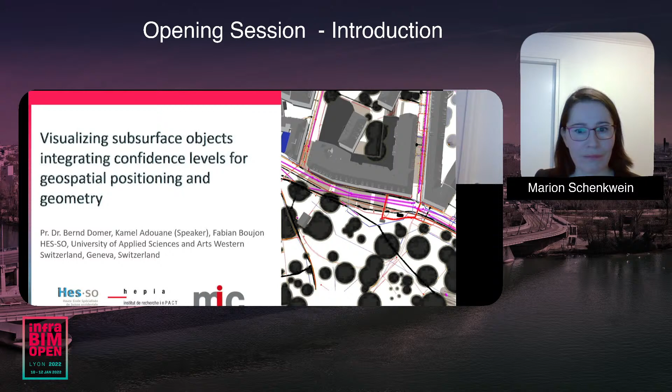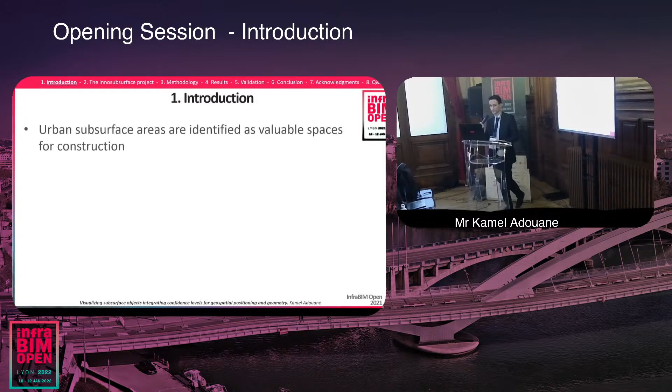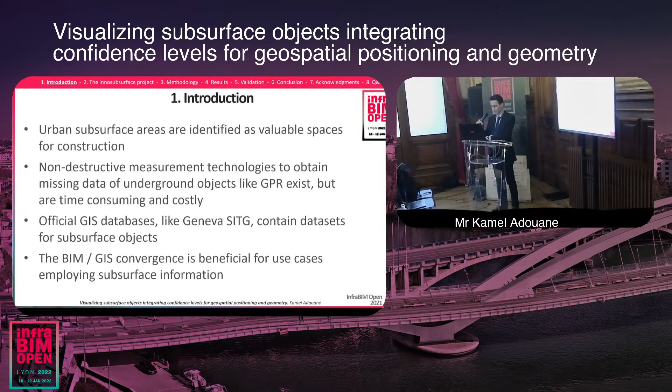The overall objective of the project is to obtain a complete description of subsurface objects, including placement and geometry for the management of underground volumes. In order to fully place an object in 3 dimensions, we need both a placement plus a geometry. To control our data flow, we went through, first of all, the development of a data structure for subsurface objects, which is called the minimal data model, that specifies all our geometric primitive requirements.

We then went through the integration of the information present in the SITG Geneva database to fit our minimal model requirement for the data we already have. If some of the data we're looking for is not available, to identify it first and then additive hypothesis. Also, we had to determine the confidence level for the represented data, since uncertainty gathers in our data flow. And finally, we went through a qualification of spatial information for underground volumes.

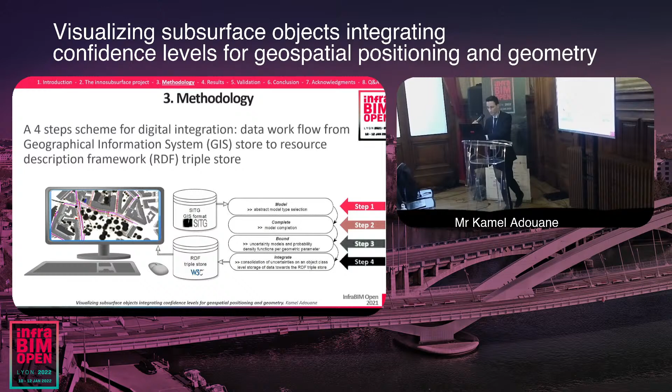A set of simplifications of geometry is involved in the models to represent, for instance, buildings modeled by extruded polylines. To model foundations, we used cross sections of rectangles along a line. Cylinders are also used in our model, or tubes and pipelines as geometric primitives.

Let's have a look at other sets of simplification of geometries. Pipelines with trapezium cross sections again. And there is an uncertainty along the depth which is characterized by the alpha angle. Cubes to characterize truncated cones, again with this alpha angle for the uncertainty along the depth, and a set of 2 cylinders again.

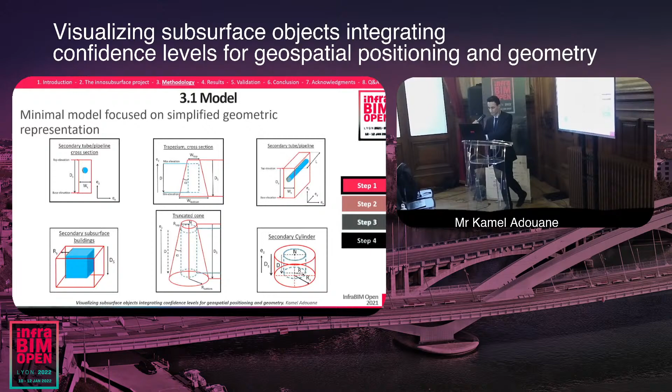The SITG database we used had first to be completed before our geometric parameters could be fully used. However, we had to face 2 issues to cure before seeing our objects in 3 dimensions. We will see examples on the 2 next slides.

The first aspect we had to correct is quite rare and concerns the dimension of some utility lines. The second one more often concerns the depth of the subsurface elements, which is, for instance, the Z coordinate; a confidence level associated to the precision forecast, according to Geneva expert interviews, is developed.

Let's have a look at our first example. To place an object underground, we need both a placement plus a geometry. In that case, we want to place a pipeline underground. The placement is complete. The geometric primitive is incomplete since the diameter was originally missing. We had to complete it by adding a hypothesis about the diameter, which is characterized by this green arrow, so that now our object is conceptually complete and we can project it in 3D.

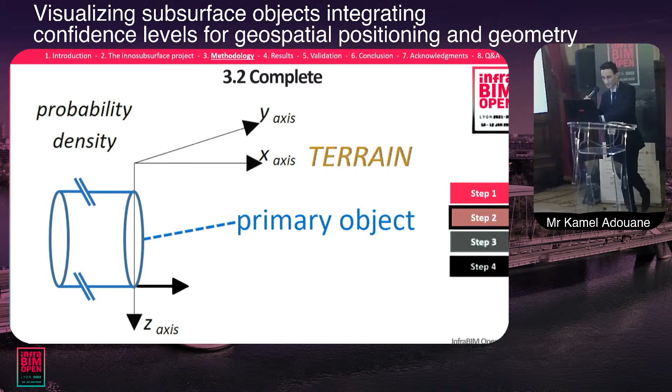Second example, we have a geometric primitive which is a pipeline which is complete, but the placement is not. The Z is missing, so we had to use a statistical law called the PERT law, which is a beta law characterized by a set of 3 coefficients, A, B, and C, in centimeters. This law is calibrated with empirical data from a different location with similar data sets, where the depth is not missing.

In the SITG database, the positioning and the depth are subject to uncertainties. This uncertainty is captured in a dual form called the secondary geometry objects. In the case of a natural tree root, we have a cylinder for both the primary object and the secondary object. In the case of a pipeline, for the primary object, we have a tube. For the secondary object, a rectangle.

Confidence size: with a higher degree of confidence, the bounding volume increases. However, this representation is purely conceptual. So now we'll have a look at how it can be implemented.

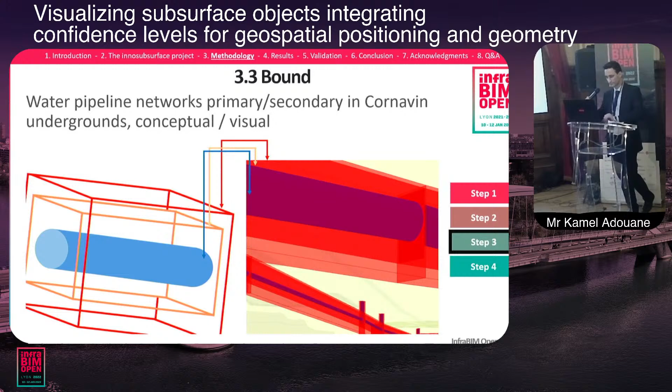The strategy of our subsurface global workflow for our data is to converge all the information towards an RDF triple store, which includes, first of all, the development of an ontology expressed in OWL. This gathers information about the minimal model. We then need to get all our information from the database with a set of additions. They are formatted according to the generic representation model.

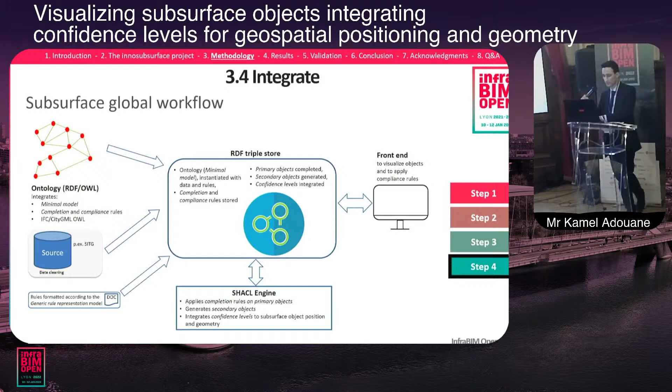Also, some artificial intelligence is used for subsurface object positioning and geometry. When all this information has converged towards the RDF triple store, we then have the possibility to project this information in 3D, to visualize and apply compliance rules. The amount of information available in the SITG database is exhaustive.

Here we have the type of plantation, as group or life expectancy. This information is not directly linked to the geometry, so we did not select all the information present in the SITG database. The flow from the GIS layer towards the RDF triple store database needs information about how to characterize a cylinder, or a tube in the case of a natural gas pipeline, or truncated cones to model the secondary object for piezometers.

Let's now have a look at the results. We propose a set of 2 subsurface areas to expose our results. The first location involved is the Cornavin area. This area is interesting since, first of all, it is central in Geneva, and there are lots of subsurface objects present in this area. This is also where we can find a train station. The area surface is 0.32 square kilometers.

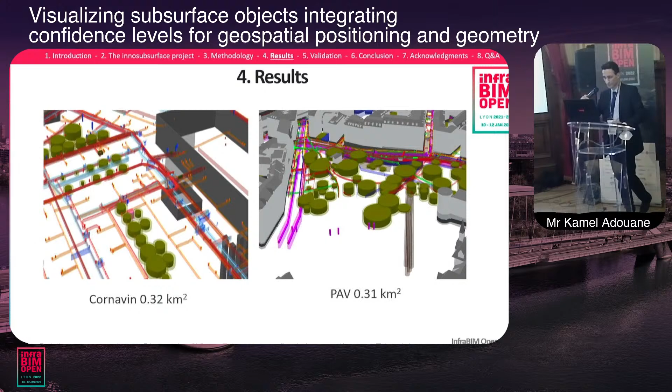And the second involved is PAV. PAV is intense in subsurface object densities. The area is quite similar to Cornavin, and also in the center. We propose now a live demo to expose our results. In this map, you can recognize the center of Geneva with the Lac Léman on the right-hand side. The straight lines represent the utility lines in the

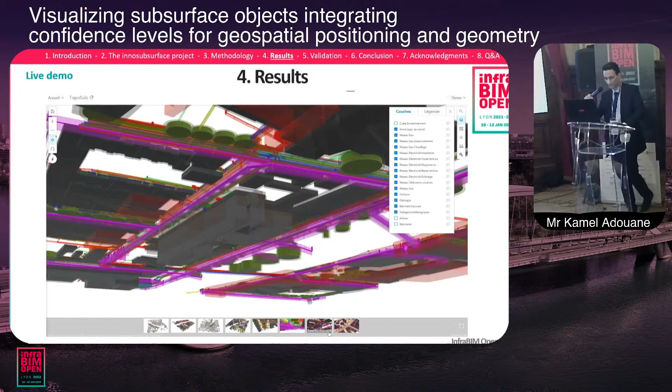In addition, we can identify the volume around, which incorporates the precision parameter. We expose the high-level density presence in the undergrounds of Geneva. In this, we also have the possibility to get the details about the layers involved in the 3D. They are displayed, connected networks. And finally, an additional view to consider buildings above the surface.

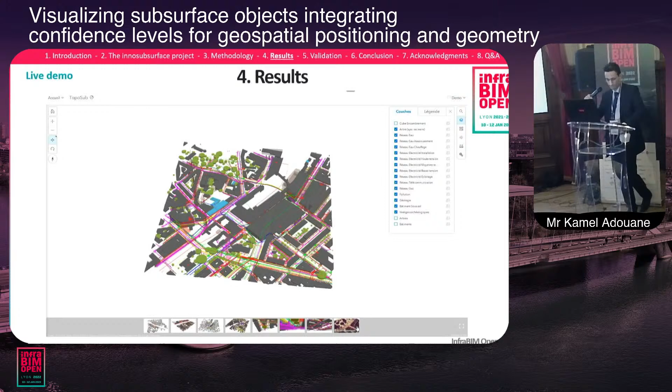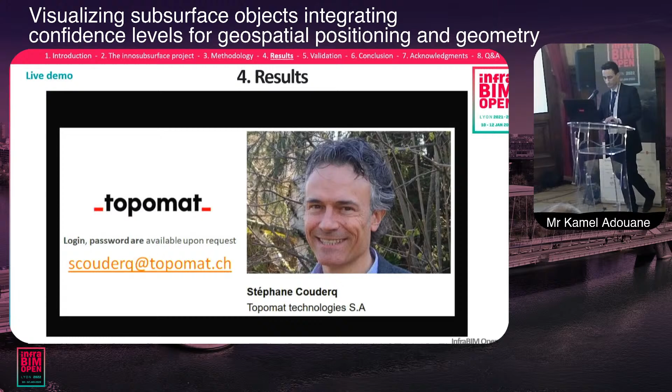Once again, you can go to the next slide. Yeah, sorry, it will be tedious in this way. I have to say next, but can you maybe go in full screen so we don't have to scroll the video?

Okay, good. So my name is Evandro Alfieri. I work in the field of information management here in Italy at Engisis. And as Vincent mentioned, in the last 4 years, I've been involved in the overall effort of buildingSMART to develop the latest IFC standard for infrastructure, covering all the various domains of infrastructure with many stakeholders. And I would say that I'm deeply involved in the challenge of, as Vincent said, the quality of data,

meaning collecting requirements and making sure that those requirements make their way into a formal specification, that this specification is delivered to something that has to understand it and translate it into answers and then deliver back the results and the response to these initial needs. So I'm quite sure you're familiar with this process, and probably you agree it's not a very smooth process, or at least subject to improvement. So you can go next slide, please.

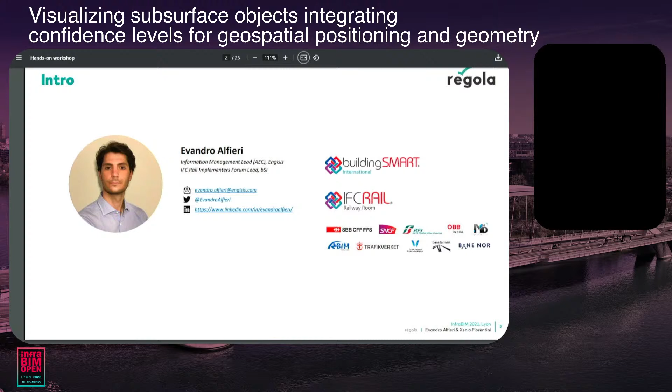So this improvement in the process and data quality is the subject of today's presentation. I'm going to break it down into three steps. First, a bit of context about the information management process in the construction industry. Then I will show you a couple of applications of the methodologies and tools that we've been using in the last year to ensure the quality of the models. And then I'm going to close with some opportunities that I think we should all embrace regarding this topic of data quality.

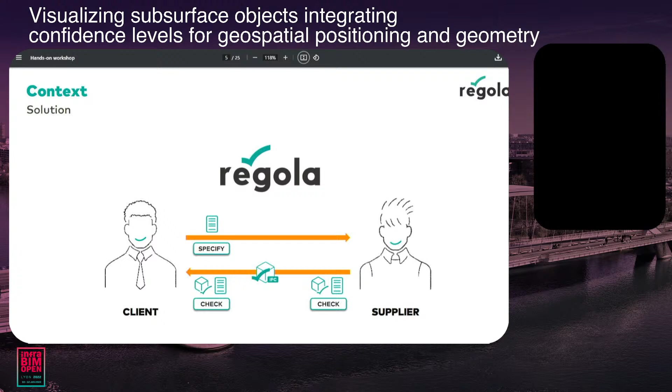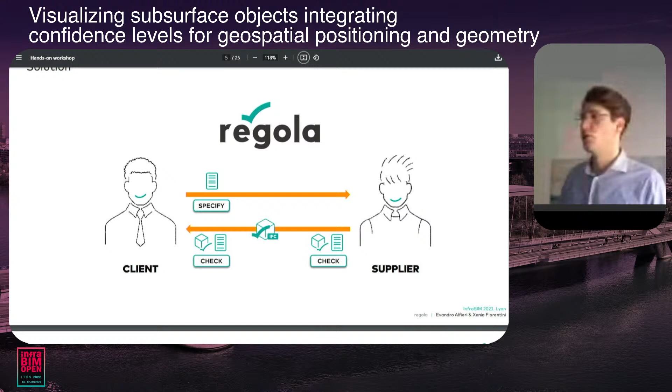That's why you see the Regola logo there, because Regola is the answer to all of these problems, at least what we are developing at the moment. Regola is a tool that helps the client specify its requirements in a formal way and submit this specification to the supplier, who can build the model and check the model against the very same specification that was made by the client. Then, of course, it can submit the model to the client, which has the same capability of validating models. You can go next.

So, how does this work in practice? As I said, Regola is a web-based platform. So you first create your specification starting from a catalog of rules, which you can pick. These rules are built and written in natural language. I'll get back to this concept. And these rules are enriched with examples and metadata so that the user and the client have full control over them and can understand them. So it can build a specification.

The second step is, of course, the specification can be attached to a contract or simply passed over to the supplier. And then, as you saw before, either the supplier builds a model and checks the model himself before submitting to the client, and the same, of course, can be done by the client when it receives the model back. So the result is a validation report showing all the different rules and steps, whether they are fulfilled or not, what has failed, what has passed, and all the elements that are supposed to be adjusted.

You can go next. We can see you now on the screen, Evandro. It's good news. Oh, okay. Can we try again? Because at this very point, I would have a video. The video is embedded in the presentation. So can we try again? I asked the technician if it's possible for Evandro to share his screen or not, because he has a video. Yeah, this very slide is a video. Otherwise, okay. But I have only a PDF, so I cannot show you the video. So I don't know. Can you share your screen? Yeah, sure. The technician has your video also, so the technicians will show your video on the screen in the room. Okay, so let me stop sharing. Yeah, the video is embedded in the presentation, so if you have the presentation, you can play the video.

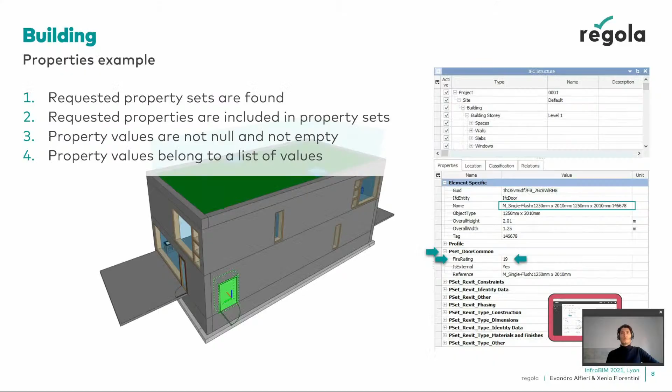No, the video is not in this one, the portion of it's not in this video. This was a backup video. Sorry, Ev- Evandro, you recorded your presentation before the session, can we show the slides with the voice? The video is not in it. Ah, okay, okay, it's not in the previous one. This one was like a backup sent in November maybe.

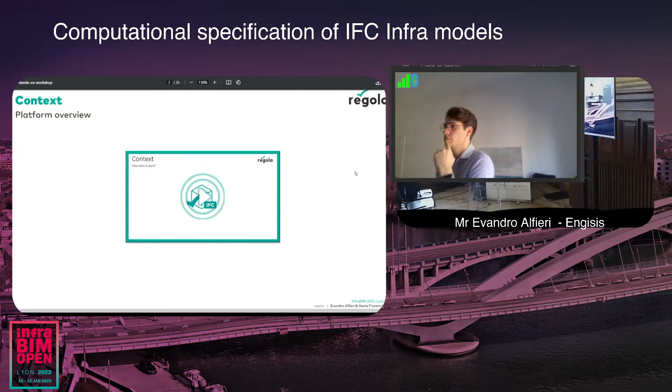Yeah, so if I share the screen, you don't see my screen, right? Try again to share your screen, please. Do you see the presentation? I can see it. Thank you, Marianne. We just need a few seconds to make these movies online. In fact, it's more a question of streaming than anything else. So thank you for your patience. Yeah, no problem.

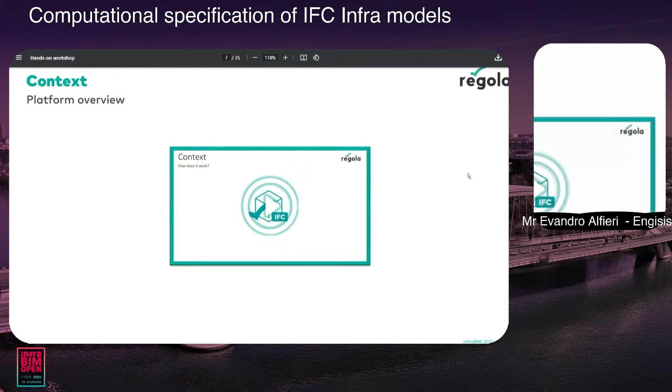It is arriving, it is arriving. I can see your screen, but it is very little on the screen. I can go in presentation mode and then the video should start in full screen. Just tell me if you see the presentation.

Hi everyone, and welcome to this session titled Computational Specification of IFC Infra Models. My name is Evandro. I work in the field of information management.

Do you think you are able to show the video, or we go on with the rest of the presentation? Okay, so it's almost ready, Evandro. Sorry, yeah, no problem, no problem. Just tell me when you see my screen. It's okay, Evandro, we can see your screen now in the room. You can start the video. So we'll start the video. There is audio in it, so let me know if you don't have the audio. I will simply talk on top of the video. Okay, there's supposed to be some sound. Just let me know if you don't hear it.

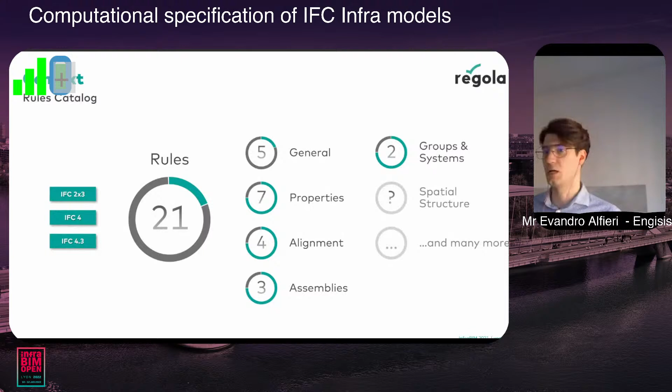And in a delicate phase also, where you have to manage the transition, the handover from the project phase into the maintenance phase - so the project information model into the asset information model. I have an example on this that I brought you today.

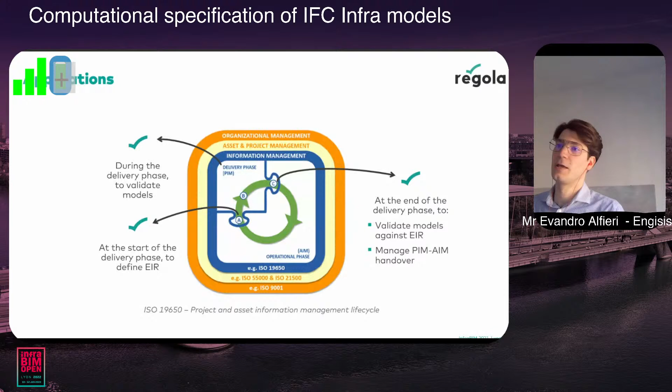And everything in between, basically - everything between the start and the end of the delivery phase, where you have the need to specify information and validate information. I would say Regola is definitely here to help.

Today I brought you 3 examples, 3 applications of the use of Regola. The first is the definition of the exchange information requirement and the subsequent validation of it. The second is a use case where there was a handover from a project information model to the model that needs to support the asset maintenance of a railway infrastructure.

And speaking of railway, the last example is something coming right away from the IFC Rail project, where there was a need to check one railway track - the need was to check that the alignment of the native model, built with a Bentley application if I remember well, was consistent with the IFC model.

So the first part, definition of exchange information requirement. You see here that I took four rules from Regola. I wanted to check that the mandatory property sets are included in the model.

I wanted to check the properties that are included in the property set are there - so not only the property sets, but also the properties inside those property sets are the ones that I've requested. I wanted to check that the values of those properties are not null, neither empty. And last but not least, I wanted to check that the values of those properties belong to a predefined list of values.

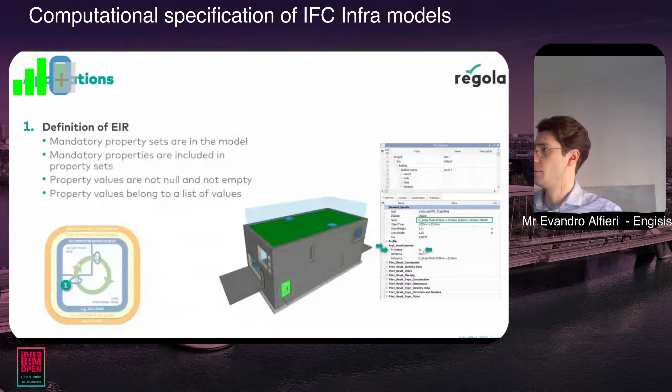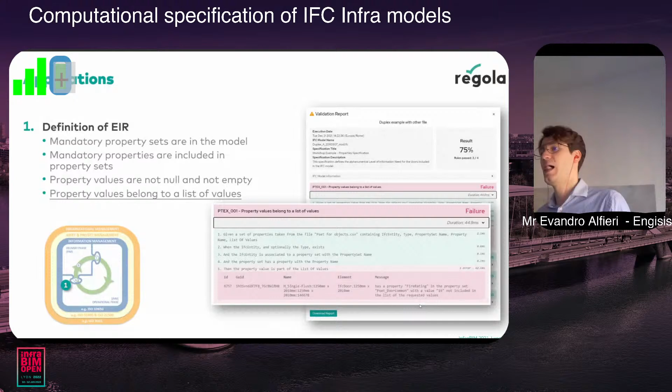The message is saying that it has a property fire rating, which is correct, in the property set P-set door common, which is also correct. But the value is 19, which is not included in the list of requested values. So these are automatically generated messages that are supposed to help fix the models or identify the mistake.

That's it about the first example. Let me dive into the second one, which is the handover of a project information model to asset management. I need to give some context: for asset management purposes, at least in railway in Italy, but I'm sure it's a common pattern, you don't need to maintain every single element modeled for design and construction. Most of the time you need to make groups of things because those represent assets, and maintenance is done on top of those assets.

So not really detailed elements, but more a collection of elements. There's a need to group objects into assets and create systems of systems, like in rail and road—it's a common pattern. Then you need to maintain those groups, those assets. Sometimes there are elements in the model requested for asset management purposes, and other elements that are there for construction or design purposes, but you don't really need to feed them into the asset management system.

It's really a selection of objects that needs to go forward to maintenance. In this case, you have asset A, made of asset X and B, but only B is required for maintenance. So it's all about grouping things and leaving things outside. The rules made in Regola were to make sure that the mandatory objects are present in the groups or systems that are supposed to be maintained. In the case of A, I wanted to be sure that at least B is included.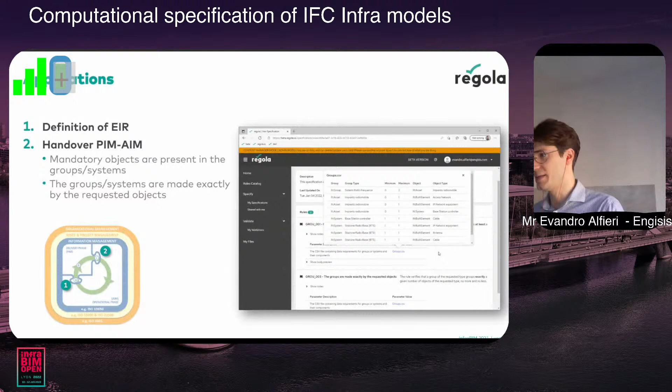We provide all these requirements in a CSV format, so the rules know where to go to check the IFC model. These are the results: the first rule is a full pass, a full success, but the second rule has an issue because it found one element with this ID, this GUID, and this name—which is an IFC asset grouping one IFC system of a type that is not requested. So you get the concept. That's it about the second example.

Let me quickly wrap up because due to some technical issues, we're probably out of time. This one is coming directly from the IFC Rail project, as you can see from the logo of the Italian infrastructure manager companies and ACCA Software, which in this case is the provider of the IFC model. Here we wanted to check a 16 or 50 kilometer line of alignment made of different components, so horizontal and vertical layout of the alignment.

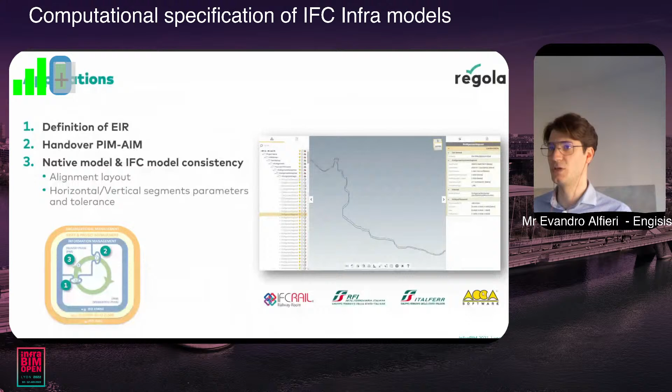And we wanted to make sure that the native file generated from the software vendors, in this case ACA, is equivalent to the IFC file generated by the same software vendor. So it's all about consistency of native model and IFC model, which is also a really important use case for our stakeholder. So in this case, you see here we made a specification made of 5 rules.

We wanted to check that it was a single project in it, and we wanted to check that the alignment is made according to certain criteria. For example, I was expecting one alignment, one and only. I was expecting one horizontal layout and one vertical layout, and no cant layout in this case. So in this case, there was no super elevation. So I wanted to check that there were 0 cant layouts in the model.

And also I wanted to check the segments of these alignments. So in this case, I highlighted the horizontal segments. As you can see here, I wanted to check all the tolerances of the segments. So each and every segment constituting the alignment, and then the starting direction, the radius of curvature, the length of the segment. And on these values, the stakeholders define some tolerances that need to be respected.

For example, the tolerance for the starting point or the tolerance for the direction of the tangent, some very detailed requirements that of course are very tedious to check manually. So in this case, the tool is able to interpret this requirement and check the model against it. As you can see here, in this case, everyone was a success, but the horizontal segments and the vertical segments have some problem in the tolerance.

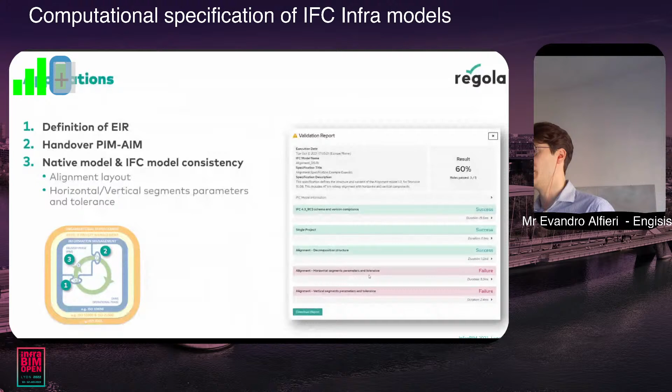So let me wrap up. These were the 3 examples, just to give you an idea of what Regola is capable of doing. Let me wrap up with the opportunities that I see for Regola and use of Regola in these use cases. It's of course a formal specification, a transparent one that is written in a language that both humans and machines can understand. And it's based on an open standard, such as IFC.

So all this means that this can be used in contracts, because again, it can be understood by humans, it can be printed out or passed over, but it's not written in natural language, so there is no need to interpret it. And it can be reused across multiple projects, because the rules are there, are public, and they are built on the IFC standard, so in a language that I'm expecting to be open and standard and be there and get reused in another project.

As you understand, this is a process that is not simply tied to the modeling activity itself. It's more about making more robust and increasing the quality of the overall exchange process. So not only the model, but the entire process has to be managed in a digital way, in a computer interpretable way. And of course, this requires the help and the support of the entire community. So the client and supplier all together work for a greater good and greater results of quality in their BIM model.

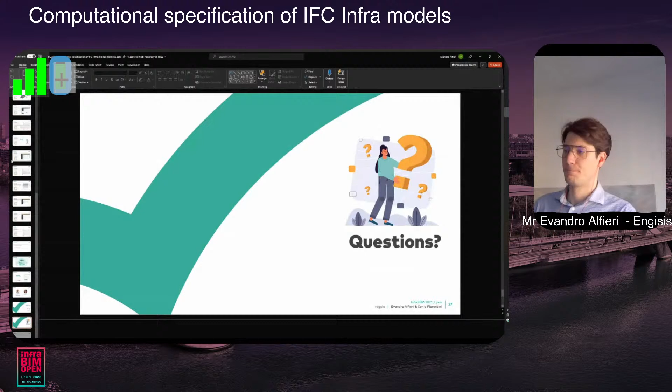Thank you very much, Evandro. What you just presented makes a lot of sense for the implementation of the standard based on the use cases that I presented yesterday in the railway session. We need to implement some new uses of digital information in our activities, and we need to have tools to be able to require some information and to deliver some information based on rules, based on requirements. So what you presented makes a lot of sense for this implementation process for the next years.

Yeah, first of all, thank you, Evandro, for a very enlightening presentation, and also congratulations for the development of a solution that very clearly has really great potential. My question is actually more from the point of view of my position, as I'm at the Finnish Transport Infrastructure Agency, and we plan to implement IFC 4.3 during this year already.

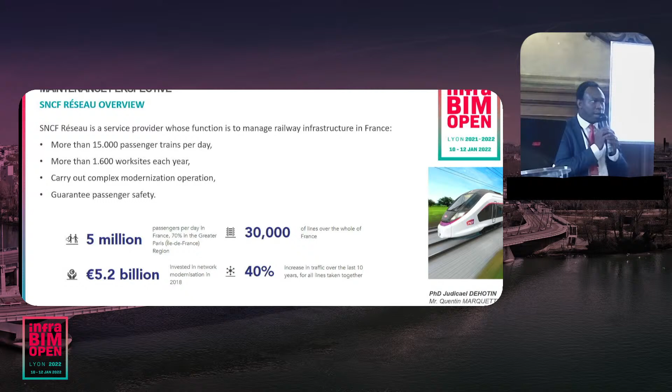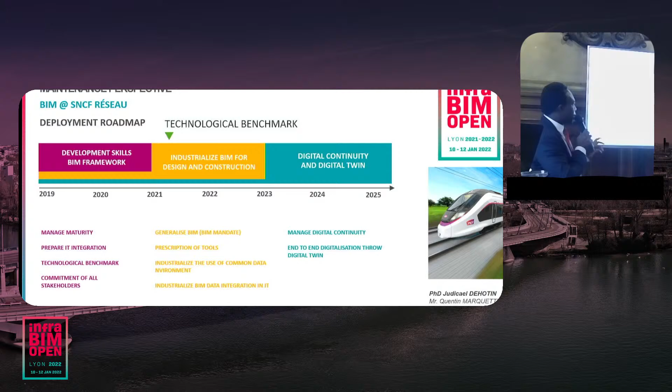Just a few words on BIM deployment in SNCF before starting the core of the presentation. We have a deployment of BIM in 3 phases at SNCF. The first phase is about development of the skills: managing the maturity of people, the maturity of tools, and the technological integration of the different tools to have an integrated system that works. The second phase is about industrialization. That means BIM mandate, generalization of BIM tools, and using information coming from BIM for different processes where the objective is to make the railway function.

So by the end, the objective is to reach, step by step, end-to-end digitalization of the railway system overall. And to come back to the experimentation context, we use BIM on 30 kilometers of line south of Paris. The idea is to check how BIM and the BIM philosophy can help to do that.

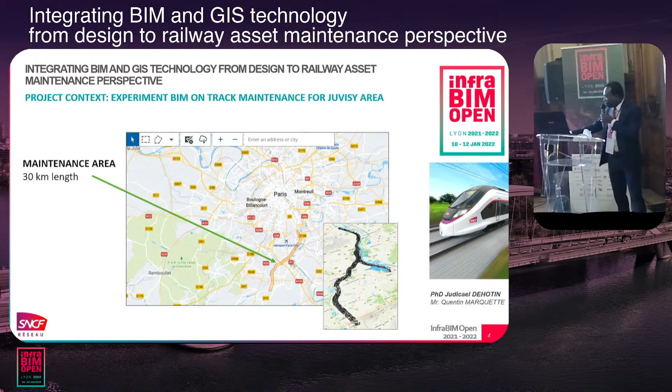The starting point for this is to use existing data. Existing data is something classical, different kinds of CAD information from different sources, but it's also massive data coming from LIDAR, point clouds, and massive data coming from the line side database, internal databases, geolocated databases. So the first step is to manage all that to create.

To create, first of all, the track in 3D, that's a front asset on the railway, as the first step and the first layer created. So the main issue here is how to use rail length, many kilometers of rail, and to really manage the 3D aspect on that.

That is to be really usable, using information starting from 2D information, just point cloud, in order to be able to industrialize something and to do this task massively, because you imagine that if you start digitalization in the whole railway system, we need massive algorithms, we need something really usable in the context of massive data. So that is some issue here.

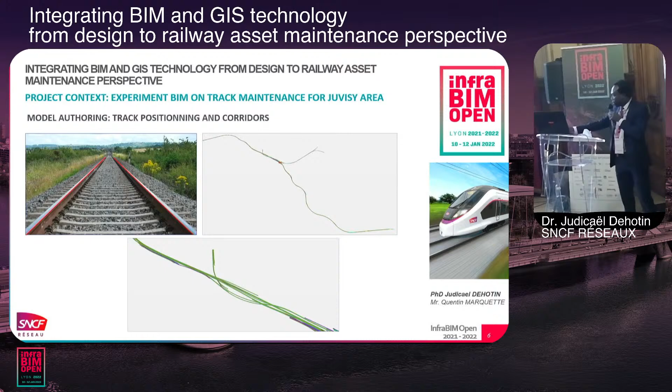And to come back to the maintenance aspect, what we need to maintain and how can we create a digital model for that. The idea is first of all to identify, if the starting point is design, how the design can take into account maintenance issues to have the right digital model. So we start to analyze the assets we need to manage.

For that, the maintenance issue on track, for example, is really about track defects. We need to identify track defects, and there are many databases behind that. We need to define geometry, because at the beginning of railway system design, the design is made by geometric tolerances. That is a track requirement, to keep the train on the track. So this requirement is used to do some monitoring of the system right now. That's something real. And we need to have connection with the associated database.

And we had also to manage turnouts, because a turnout in the railway system is something really critical. We are monitoring that really precisely. And in the end, you have to represent this information in digital BIM. That means that if you have some kilometers of track, you need also to manage at which moment you have some change, for example; your digital model needs to be able to have this representation in order to associate a database with it.

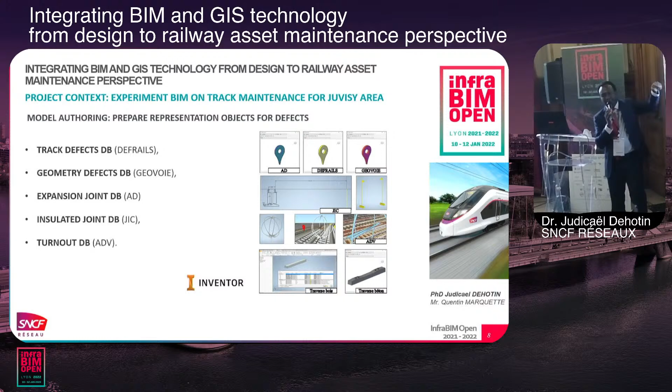And this phase is about representation of this defect using a dedicated representation. That is subjective, but it's one kind of representation that helps to represent this digital model in a comprehensive 3D environment. So in the end, this is not a process from design, it's something created from massive data, connecting multi-source data, and connecting these objects in the digital model. And using different techniques, which Quentin will present next, we tested many tools on this process to evaluate their capability to bring this information into this 3D model context.

In the end, you have people who need to maintain the track. The idea is that he can have this 3D model, click on it, and have data coming directly from the maintenance database, in the field, for example, to take the right action for maintenance. And in the end, we have integration of all this model over around 30 kilometers, and we did some tests to evaluate this model, because the idea is first to create it, connect it to the real database used for planned maintenance, and finally bring this information to the right people who need to use it.

So to do that, we tried to test many technologies, how the combination of multi-technology, GIS and CAD worlds, can work, and what the issues are. Can we say that everything is okay, or are there some issues? I think Quentin will come back on the tests we did on this idea. But for the business side, maybe the grail for an operator, such as SNCF, for this maintenance, is to say we have a digital mock-up. This kind of thing may come from the design.

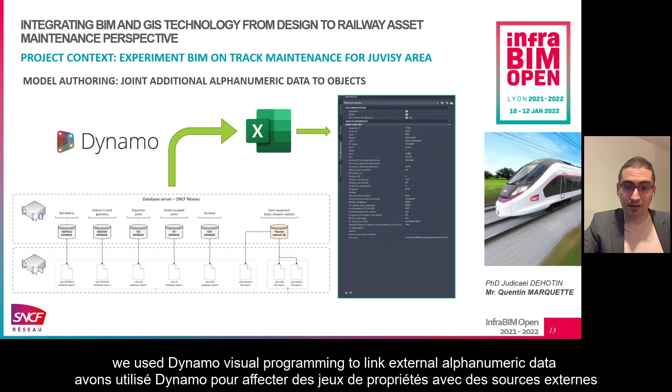Hi JDK, many thanks for your presentation. I'm Quentin, a BIM and GIS consultant subcontracted by SNCF Réseau. In this chapter, we will talk more deeply about software and data flow information. For the first experimentation about maintenance model authoring, we used Dynamo visual programming to link external alphanumeric data to 3D solids coming from a corridor in Autodesk Civil 3D.

This workflow was admissible for rail or ballast areas, but we discovered some deficiencies about sleepers implementation. We had massive objects, and maybe it will be smarter in the future to use a GIS approach with 3D symbology. In fact, whatever the physical representation of a sleeper, timber, concrete, or bi-block sleeper, it would be preferable to use only points and change stylization on the fly.

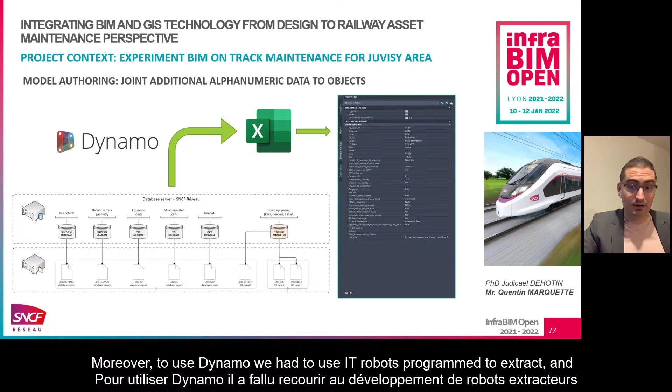Moreover, to use Dynamo, we had to use IT robots programmed to extract and so duplicate information from internal data lakes. Still, with a GIS approach, we can expect to do a better job in the future by a direct connection on urbanized data with our new Trimble Quadri and Connect common data environment. Connectors are the key to success.

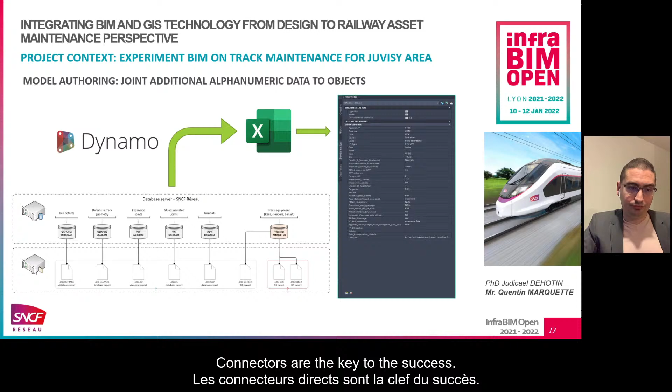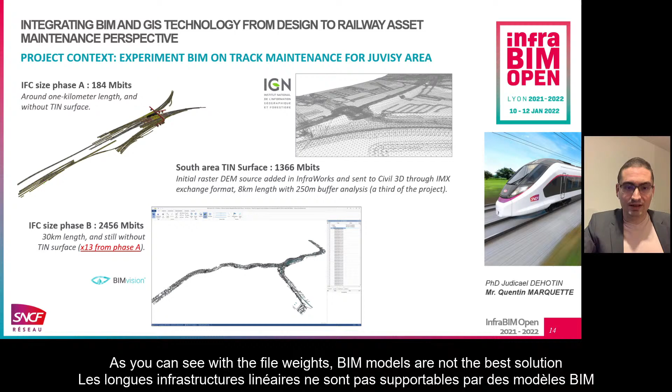The project was completed in 2 phases. Phase A, experimentation on 1 kilometer length. The IFC export is about 184 megabytes without the terrain. For phase B, it was the full maintenance area described previously by JDK. For 30 kilometers, we have 2.5 gigabytes of IFC, still without the terrain. The last one was too big to be created in only one part, so we had to split it into 3 areas. As you can see, with the file sizes, BIM models are not the best solution to support the full tracks managed by an infrastructure owner such as SNCF.

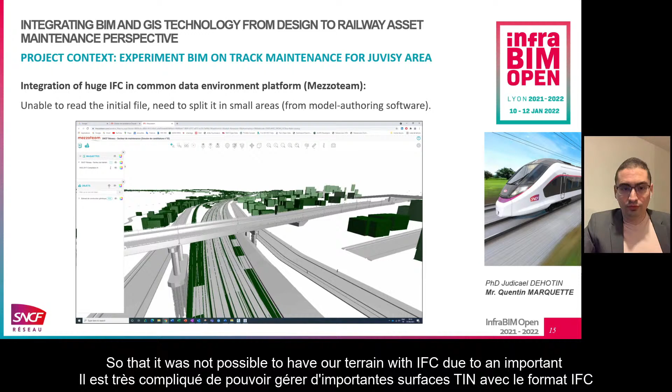The initial IFC file for the 30 kilometers maintenance area was so large that some SaaS platforms were not able to read it. Here, for example, the Mezzoteam common data environment from Prozis. It required splitting into several small length areas to open it on the cloud, still without the existing ground. So it was not possible to have our terrain with IFC due to the important linear length and numerous track elements.

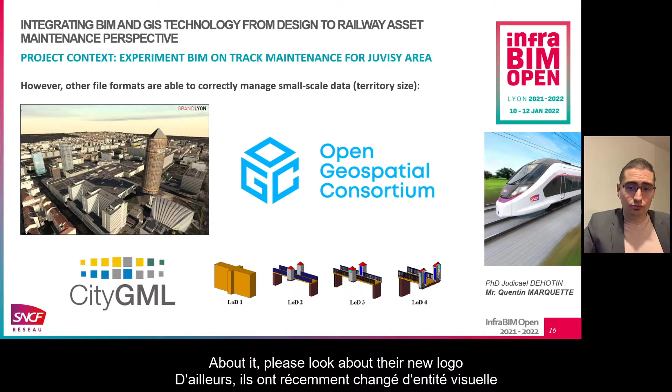We decided to start experimentation with the CityGML format. CityGML is an open standard issued by OGC. About it, please look at their new logo. We have several levels of detail representation, very different from what we can have for BIM models and the new ISO 19650 definition.

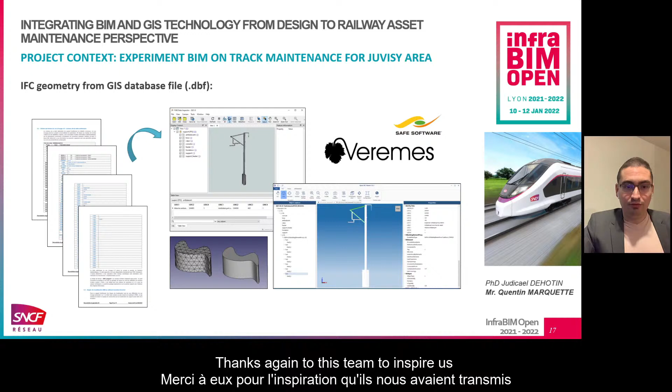To start writing CityGML, we reused former investigation about FME middleware and former scripting. With Veremes distributor in France, we were able to recreate geometry coming from GIS data tables by fixing a solid tree construction upstream. Thanks again to this team to inspire us and complete our first step alone with FME Workbench.

Moreover, to identify the main useful transformers allowing to write or transform CityGML, we had access to several samples coming from Safe Software. Do not forget that this technology is the only way to bring back files to AutoCAD, to Autodesk Map3D, InfraWorks, or Esri ArcGIS ecosystem.

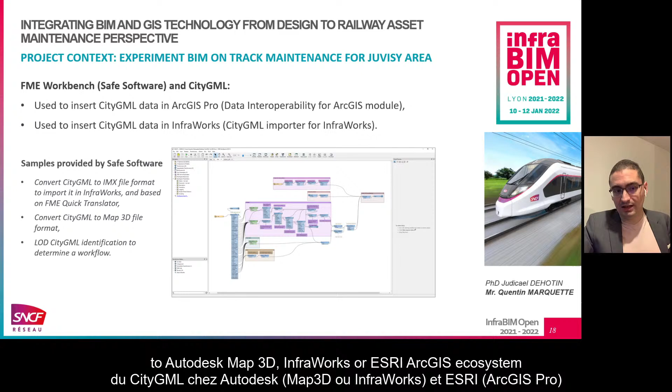The first step was to write CityGML directly from a native model authoring file format. We discovered just how to complete scripting, and we didn't try to optimize the features in correct classes. We just used generic city object. We had a surprise for the 22 GB weight due to sleepers representation. For the future, we will for sure investigate 3D symbology for sleepers.

Unfortunately, very few viewers can read directly CityGML, especially in 3D. Some of them can only open in 2D, such as QGIS. CityGML is a complex data model and requires very large files. Each of them can be directly edited by a simple notepad. About geometry, CityGML uses only boundary representation, named BREP, and cannot use the CSG or sweep path representation.

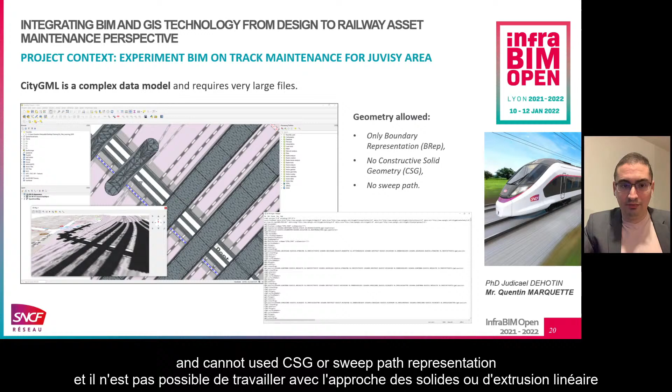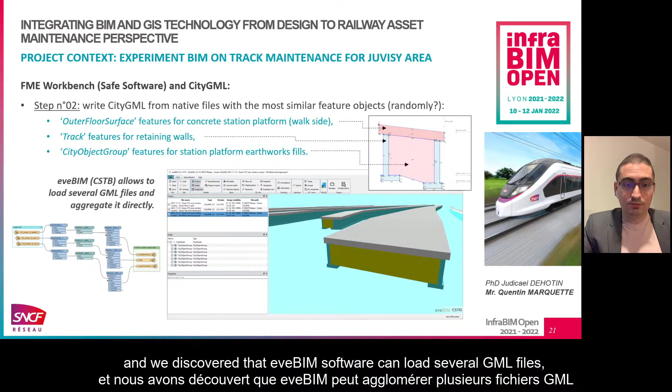The second step was to write CityGML with simple features, no longer as a generic city object. Randomly, we chose what sounds the most similar object without integrating the potential links between several CityGML features or parts. After all, when you are discovering CityGML classification with an ETL tool, all features are listed by alphanumeric order. A transformer dedicated to appearance allows us to keep different colors, and we discovered that eveBIM software from CSTB can load several GML files and aggregate them without the requirement to have all placed in the same file.

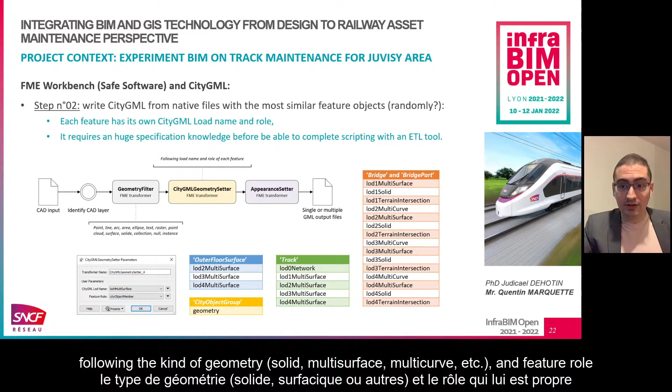55 features are standardized in CityGML format. Each of them has its own requirement related to level of detail 1 to 4, following also the kind of geometry, solid, multi-surface, multi-curves, and so on, and feature roles. It is more complex than we thought to find the correct combination and succeed to write CityGML files.

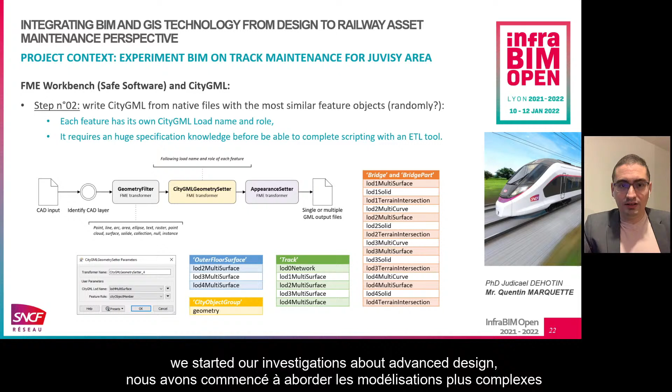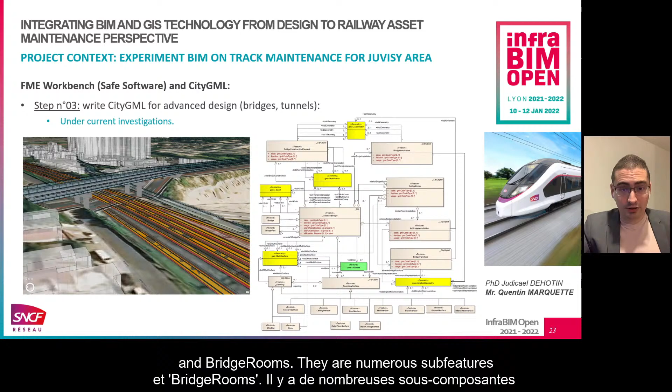There are numerous sub-features. Of course, you will also have a similar definition for tunnels. Don't forget, whether you are working on bridges or tunnels, that the structure is based on a road, so a transportation part, also linked to the terrain. Semantic and topology representation must be taken into consideration.

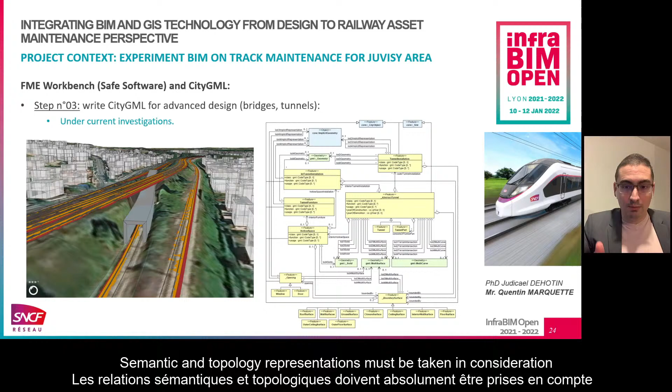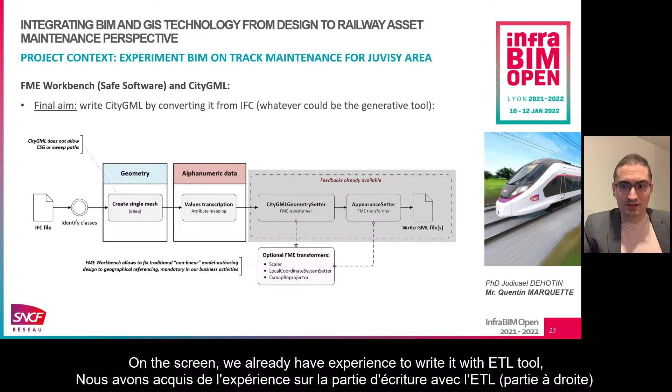Until now, we just worked on translation of native files to CityGML format. The next goal is to be able to convert directly IFC files to CityGML. On the screen, we already have experiences to write it with an ETL tool, but we still need to investigate how to transcribe IFC classes in BREP and keep alphanumeric data with attribute mapping.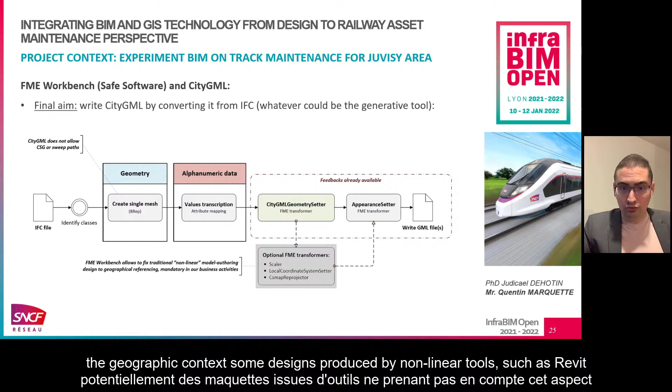Cherry on the cake, FME Workbench has transformers allowing to bring back to the geographic context some design produced by non-linear tools such as Autodesk Revit. We didn't start yet to have a look at it, but it will be a future challenge.

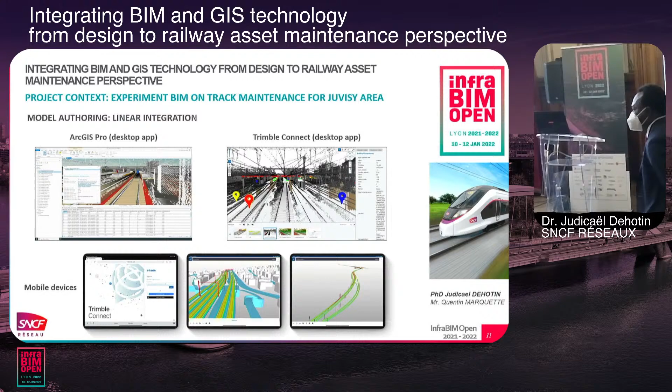Thank you, Judicael, for your very nice presentation. As far as I can understand, your strategy now is not to focus just on BIM, but to focus on GIS for operating and maintenance support. So the thing is, do you have right now specification for a BIM model that a company will produce for you in different projects, to allow you to implement your tools easier or in a more efficient way into your database? Do you already have something that we have to do, or something that we surely must not do, to allow you to implement it quickly and safely?

Yeah, very good question. I think we are trying to make something in the contract. We need to produce, but we'll also need to develop something to integrate. So it's something we need to do step by step. And right now we don't have clear specification on maintenance phases, but it's something we are working on.

And what we have done so far is to say, okay, at design phases, what is the work in the IFC project to specify a PSET. We know that at design phases, this information is always available. Typically, if you have design phases and you have some track, you know exactly what monitoring you need to put in place to monitor this kind of track you implement. So this information is always available in the BIM model.

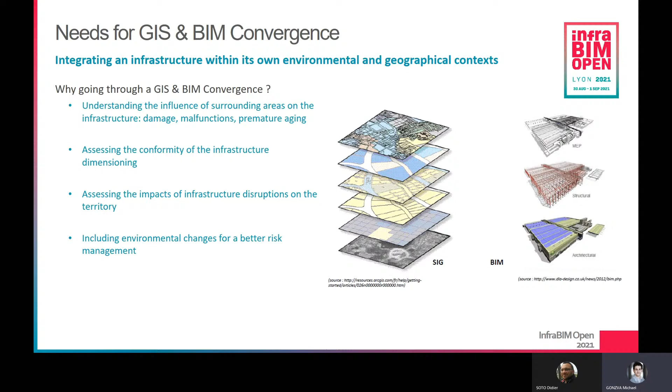So in this context of BIM and GIS convergence, we developed a first theoretical approach dedicated to climate-related damages if a hazard occurs, based on what we call functional resilience modeling - meaning globally the capacity of an urban or rural area composed of many infrastructures to absorb a shock and get back to normal functioning. The inputs of the tool are the geographical related data usually coming from GIS, the infrastructure related data coming from BIM or GIS tools, and the climate related data usually coming from GIS. In terms of outputs, we're able to provide functional diagrams and cascading effect assessments between territorial infrastructures, which go back into the GIS tool. We're able to assess successive disruption scenarios, the costs, and repairing time associated with these damage scenarios.

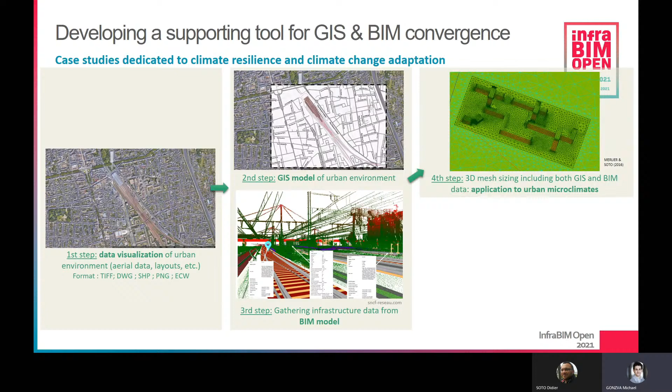For example, you can quantify urban microclimates, mostly due to urban heat islands in a context of climate change. You are also able, by combining both GIS and BIM data, to assess cascading effects within an infrastructure and between infrastructures on a given territory, for example when a flood or heavy rain hazard occurs. We will give you some precision on these two case studies.

So here is the first presentation of the tool. The video summarizes all parts of this project. First, you have the possibility to select the infrastructure and all its related components. Secondly, you have the possibility, as you can see, to select the hazards, for example the flood hazard.

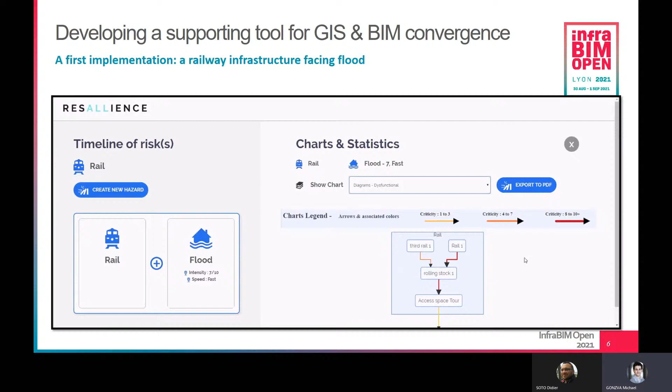And in all its own features, so the speed of water, the water level, the intensity, and so on. The combination of those two parts allows us to provide all disruption scenarios, meaning the successive damage to components if a hazard occurs. After that, you have the possibility to show all these results on the geographic information system.

Showing where the damage components are within the surrounding areas of the railway infrastructure, as you can see on the video. You also have the possibility to get further details of the damage processes by consulting the database behind the GIS for each component, to really understand which processes occur behind a hazard when it hits your infrastructure and your territory.

Some first conclusions before giving the floor to my colleague. First, developing such a tool within a GIS and BIM convergence context allows us to represent output data through open GIS software, for example by using QGIS, or by creating web mapping applications such as Lizmap.

There's also the possibility to use open BIM software, for example by using IFC formats. This allows us to progressively use BIM models for managing climate risk and infrastructure adaptation to climate change, because today GIS is one of the main tools used on these topics, and the convergence between GIS and BIM could greatly improve the analysis of vulnerability and resilience.

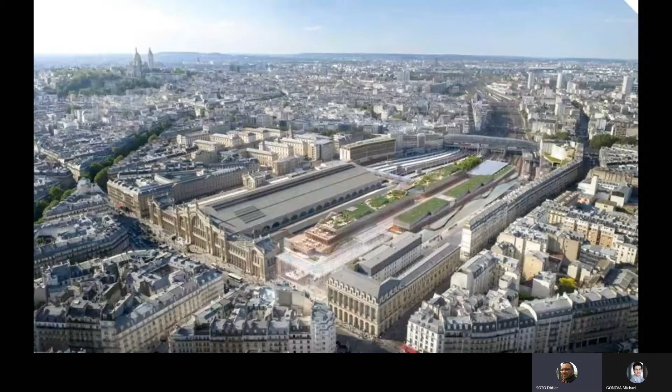We will take the railway station of Paris Gare du Nord as a case study to illustrate how the convergence between GIS and BIM has been useful to model the future impacts of climate change. A new terminal is under construction, and the real estate promoter asked Resallience to assess the benefits of a landscaping project on the roof and the facade. Next, please.

For this, we developed a 5-step methodology, during which a workflow of GIS and BIM data and processes was developed. We take input data from the French National Geographical Institute GIS database and the customer's own data in AutoCAD format, which we import into our GIS. We simplify the building geometry by smoothing the main facades, and make a 3D extrusion of the buildings to get a 3D model of the railway station planning project. Next, please.

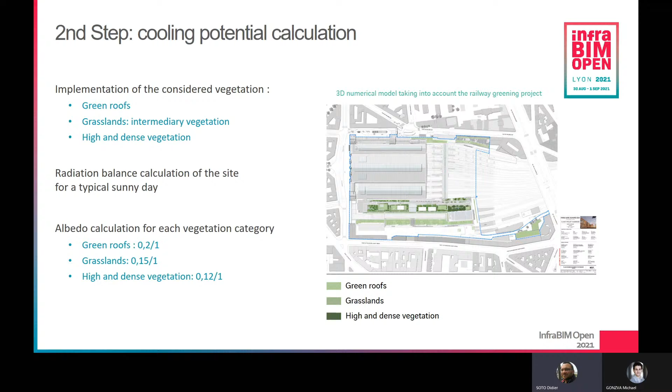The second step was to calculate the potential cooling triggered by the landscaping project. We take from the BIM information and geometry data relative to the chosen vegetation. We calculate the radiation balance on the site for a typical sunny day, as well as the albedo properties for each vegetation category. Next, please.

A specific meteorological scenario was chosen with a maximum temperature of 31 degrees and relative humidity of 60%, to consider a particularly uncomfortable thermal ambience. Evapotranspiration was calculated to estimate the latent fluxes brought by the vegetation according to its nature and height. By using the information taken from the BIM of the railway, we estimate that the amount of released energy is equivalent to 200 individual air cooling systems. Next, please.

The third step is to develop a 3D mesh sizing of each building face by taking information both from the BIM and the GIS. We take into account building thermal properties following the construction materials and the shape and height of the buildings. The total amount of meshes exceeds 2.9 billion, with a specific resolution ranging from 0.1 to 2 meters in the main buildings. Please, next.

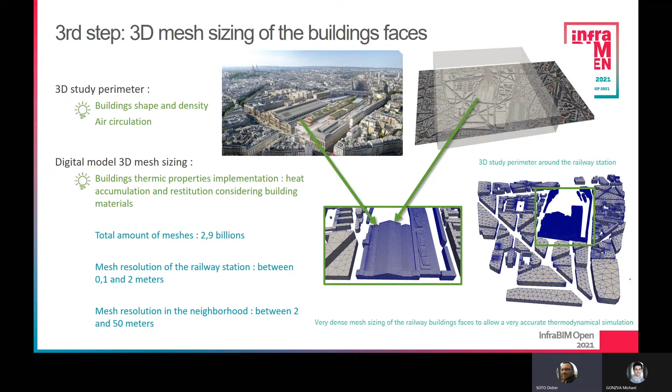The meteorological reference scenario is set in the fourth step according to the future expected climate of the railway station. Next. The fifth step is to model the wind circulation between and above buildings through a computational fluid dynamics approach. Next, please.

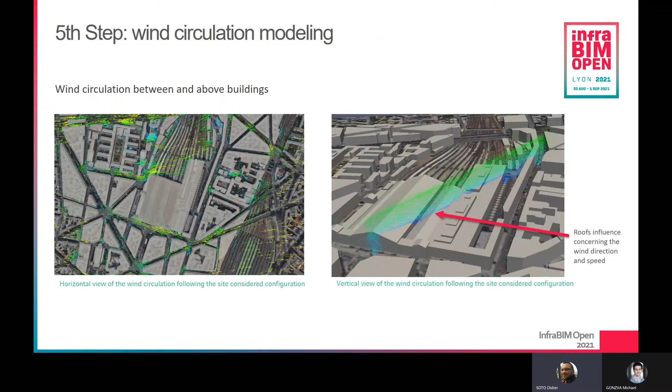The results are post-processed in the GIS with an overlay of the air temperature values on the buildings and roads. It is now possible to estimate the loss of temperature induced by the landscaping project and to bring a cooling envelope near the roof and the facades to consider the 3D area where the temperature benefit can be felt. Next.

So these several views can help consider the cooling envelope estimated at 0.5 degree. Next. 1 degree. Next. 1.5 degrees. Next. And the last, 2 degrees. And next, please.

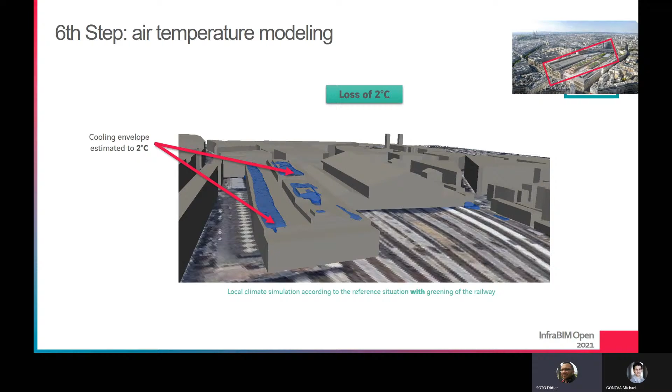So those videos can help understand the spatial dimension of our modeling approach, with the first scenario of hot temperature around a maximal value of 31 degrees. We can precisely localize where the temperature benefit is the most important, mainly on the roof. The cooling envelope can also be precisely determined. Next.

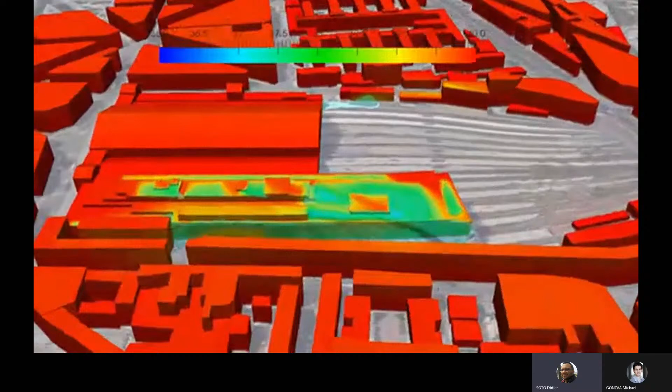The second video deals with the very hot temperatures, the 40 degree scenario. The evapotranspiration performance is lower due to the drier and hotter thermal ambience, but the benefit can be localized on the roof. The width of the cooling envelope is also reduced. Next.

Our approach can help developing workflows to facilitate the integration of GIS and BIM data and highlight the need to build capacities to develop a common culture of GIS and BIM uses among real estate promoters and infrastructure managers. The next steps will lead us to automate workflows to optimize the process sequence instead of the successive steps we used in this study. Within the MINnD working group, we aim to build and share common practices for designing and guiding interoperability of data, especially open data.

We finally think that AI can be a good way to manage big data in terms of qualifying the resilience of building standards at each life cycle step of an infrastructure.